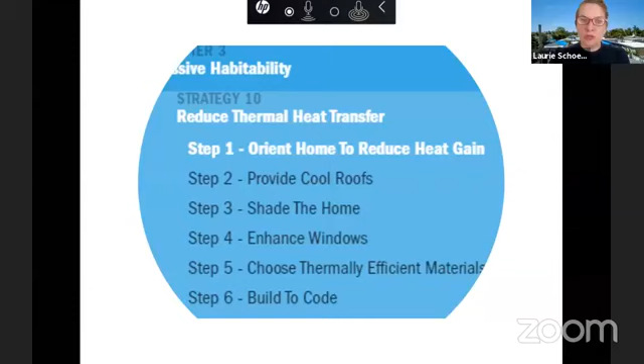Next slide. Today, we're going to talk about the major strategies that relate to passive habitability: orientation of homes, providing cool roofs, shading the home, enhancing windows, choosing thermally efficient materials, and building to code.

Next slide. Today, we're going to understand ways of reducing heat gain, increasing ventilation, controlling moisture and mold, benefiting from natural light, and then also understanding the concepts of grid stability and instability.

All of you on the call will understand critical actions you can take to increase the resiliency of your building design, construction, and operations. Next slide.

So before we go into the question of passive habitability, I want to spend a minute or two just reflecting on what the grid is in Puerto Rico and why we should be thinking about building housing that can survive without energy.

Puerto Rico's electricity, as in many of your communities with similar utilities, is supplied by the Puerto Rico Electric Power Authority, or PREPA. This is a government agency that owns the electrical transmission and distribution systems for the mainland, as well as Vieques and Culebra, two island communities off of Puerto Rico. This provides 80% of the electricity generating capacity throughout the island.

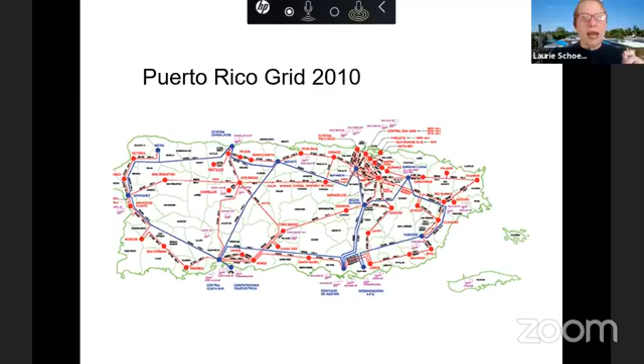So this is the major problem we're dealing with, which is that a lot of homes lose power, and that power is not put back quickly because the distribution systems are hard to re-erect as well as maintain.

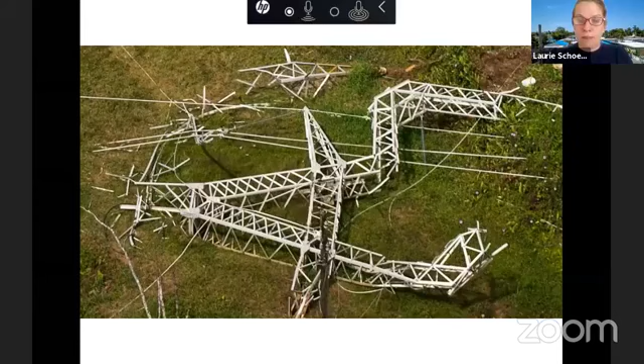Over the years, the budget for maintenance, such as clearing trees to help ensure the distribution is in place near power lines, has diminished. In 2014, there was $202 million for this maintenance, which was a reduction of $50 million from 2007.

What does this mean? This means that when the distribution lines go down because they're not maintained, the power goes out. And when the power goes out, the households are left in the dark.

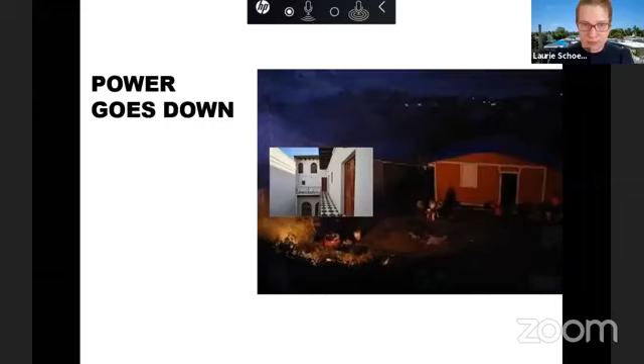How can we learn from our ancestors, from the past, about adapting to a future where these power lines are not stable? They will continue to go down. The grid will continue to fail because it is a very difficult system to maintain and operate, particularly with less funds coming in. So today's conversation is critical.

Because we have someone with us, Dr. Abruña, who is not only a great colleague of ours and friend of our program, he is in many ways considered the father of green in Puerto Rico. He had the foresight and the vision to bring these concepts to Puerto Rico at a time when no one was talking about green, when the connection and dependency on oil and mechanical systems was at its height. Dr. Abruña has been working fearlessly for years to champion sustainability principles and the principles of our ancients, to bring back natural ventilation and natural lighting. He has been one of the most incredible partners to work with on our book, which is why we wanted to dedicate this session to him. He's the founding past president of the U.S. Green Building Council, Caribbean chapter, a publicly recognized authority in sustainable design, and is in charge of his own architectural design practice. You'll hear more about that today.

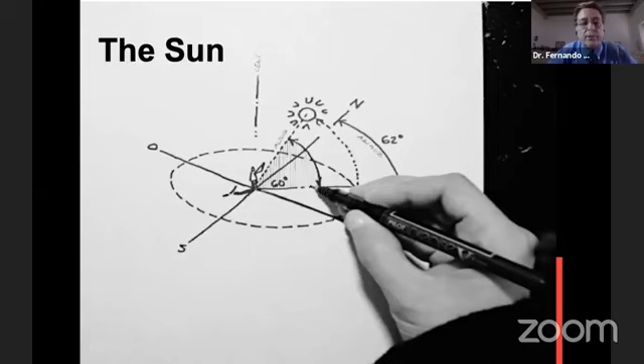Okay, so let the behavior of materials you select, the properties of forms you give to your building, and the forces of nature like wind, rain, and sun do the work for the building. That's what we try to do when we do passive design. So let's get into how we deal with the sun.

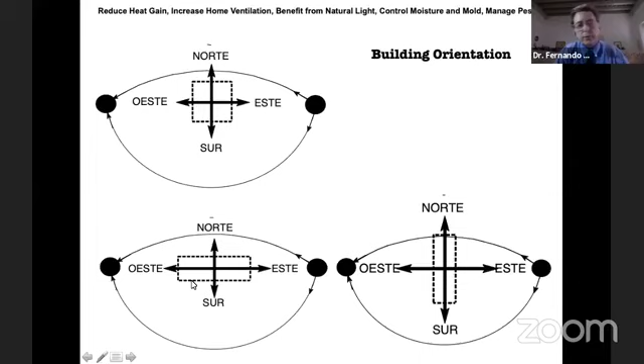So it's very important for us to be aware of how we place that building on our site. Since the sun moves on a...

higher altitude during the year, in the summer, the angle — and I'll show you a picture to better understand this — the angle will make it almost a requirement to have overhangs to protect us from that sun.

But in the south, the altitude angle is much lower, and that happens during the winter. And during the other parts of the year, the sun comes out in the east and sets in the west.

So typically what you want to do to protect your building is have vertical shading devices on the east and west orientations and overhangs on the north and south. If it's another orientation, say northeast, northwest, southeast, or southwest, then you use a combination of both.

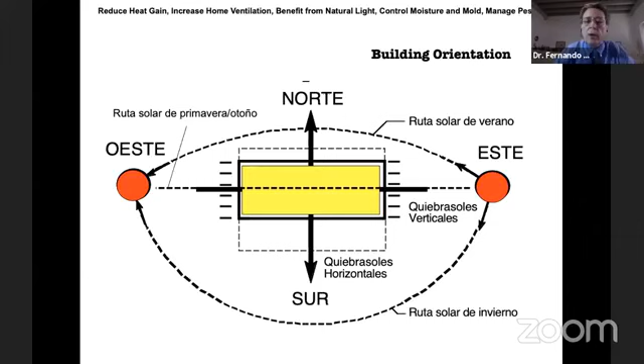Here you can better see the relationship between the winter sun and the summer sun. Okay, so it's high — the angle is very high — so with a shorter overhang, you can protect that wall. And in the winter, with a longer overhang, you can also protect that wall.

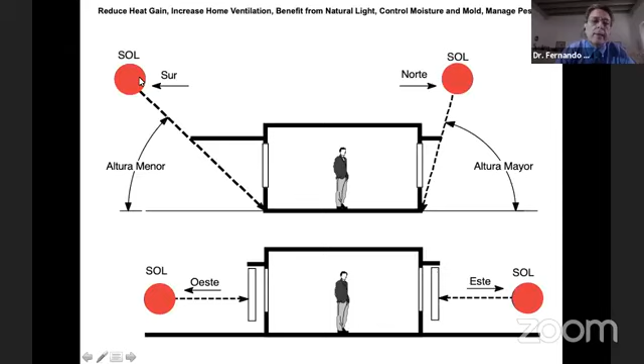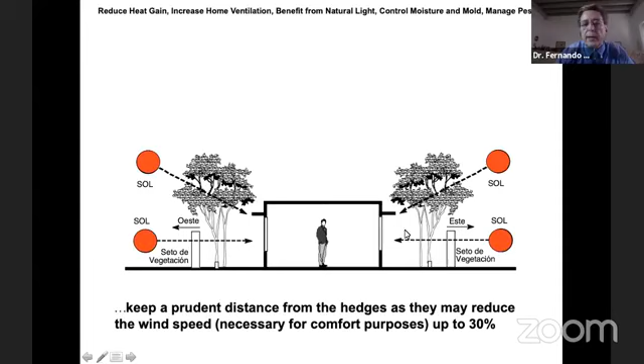In the east and west, we will be using vertical shading devices. You can also use vegetation — a hedge, a planting hedge, or a tree — to basically accomplish what we achieve with overhangs and vertical shading devices. Let's do a quick exercise here.

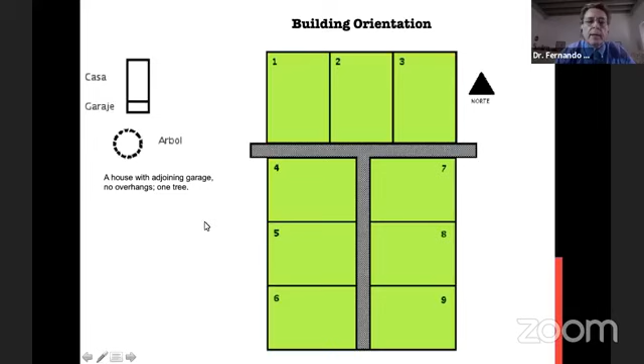Let's take the following scenario: this is a typical urban lot with typical urban development with 9 lots. North is facing this way, and we are to locate a house with an adjoining garage, no overhangs, and just 1 tree. If I were the developer, this is most probably how I would end up doing it, okay?

With the larger facade facing the street so that the house looks more regal, more important, than if I were to locate those houses with the shorter facade to the front, to the street front.

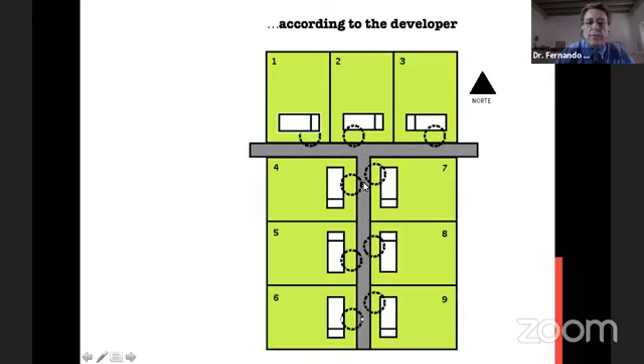But if you look at them closely and use your sustainability acumen, you will notice that these 3 houses will behave much better than this other one here, just because of the orientation factor, okay?

North, south, east, west. But of the 3 houses on top, the one on the right will be even better, because the garage will be protecting the west facade of the house, and it will act as a buffer for that heat that penetrates the house in the afternoon.

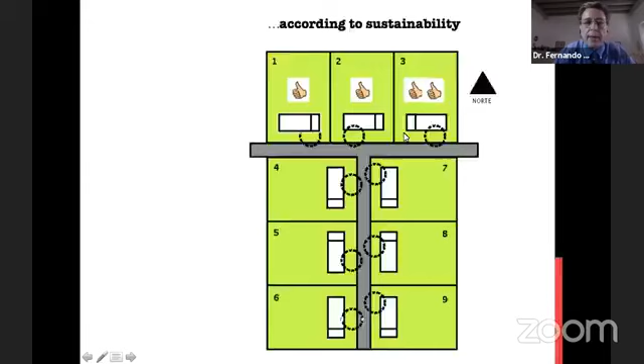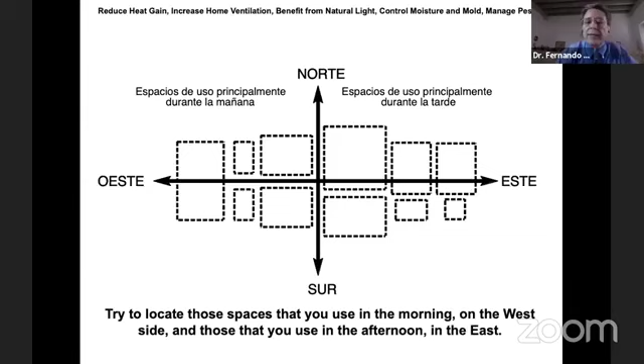So in general terms, you want to locate those spaces that you use in the morning on the west side of your house, and those that you use in the afternoon on the east, because the sun will be on the opposite side from where you'll be using your house.

So this is just an example, right? Like the garage on the west to protect the dorms, and the storage area on the east to protect another dormitory. So this is just a general idea of how to have that into your mental picture of how you want to order the interior spaces of your house.

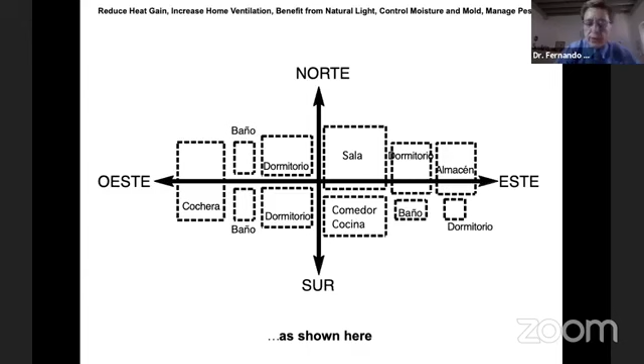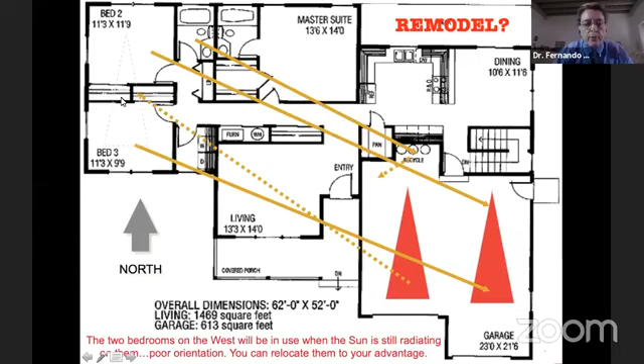You can also remodel. Say you move to an existing house and you want to improve the thermal comfort inside that house. One possibility is to rearrange those interior spaces. Again, these two bedrooms are on the west side, and typically you go into your bedroom in the evening, so those will probably be very hot in the afternoon. So you can relocate those to your advantage, as shown here.

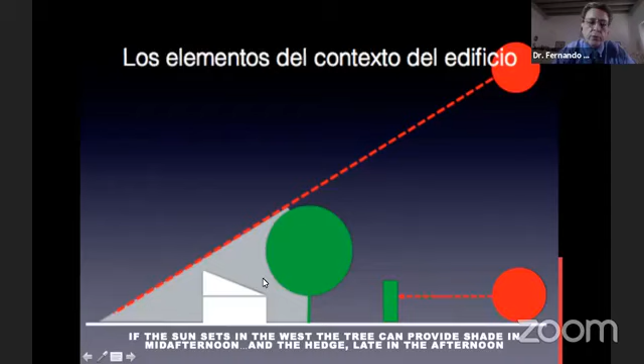And these are some other elements that we just spoke about, the contextual elements, the sun, the tree, and the shadow that it casts upon the building. If it were a mountain, it would do just about the same. So that siting is very, very important. But actually, of all the decisions that I as an architect make, siting is probably the most important one, even more important than the architecture itself.

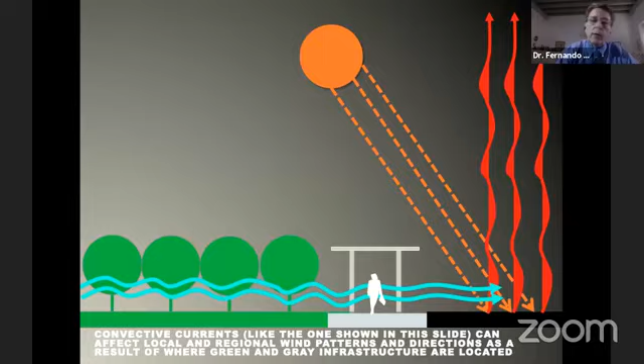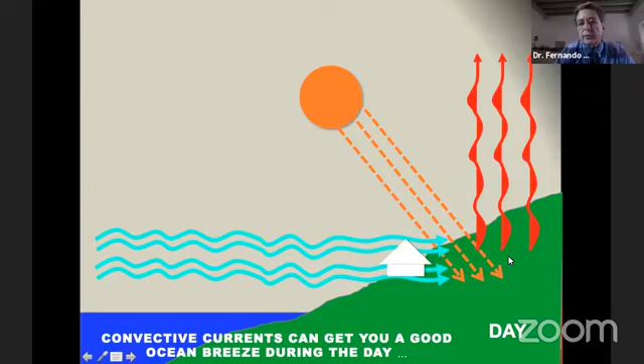So in general terms, the way wind moves regionally in the coast where we have the ocean front, it will behave in one way. In the mountains, it will behave similar to what I was showing here. We have convective currents in the ocean with the ocean breeze during the day. Since the land is hotter during the day, that same thing happens, just as I explained in the previous slide. Hot air rises, cool air comes in through the house.

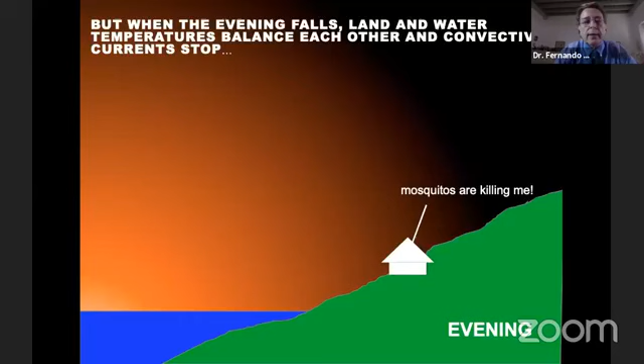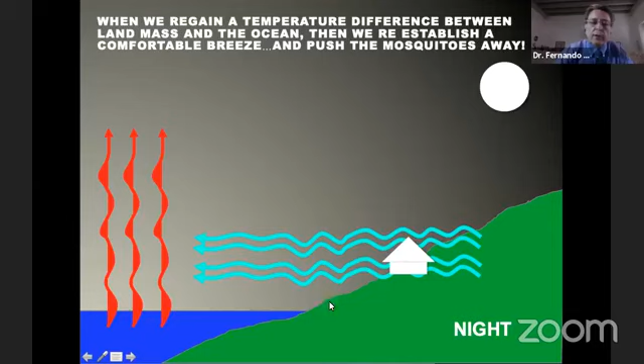When the evening falls, both temperatures, land temperature and sea temperature, cancel each other out, and that's where we have a lull and no wind goes anywhere. There's no wind at all, no breeze, and that's when mosquitoes get you. So, and that happens between 6 in the afternoon and maybe 7:30 and 8 p.m. Right after that, we get again a temperature differential, and again we'll get our breezes coming from land into the sea.

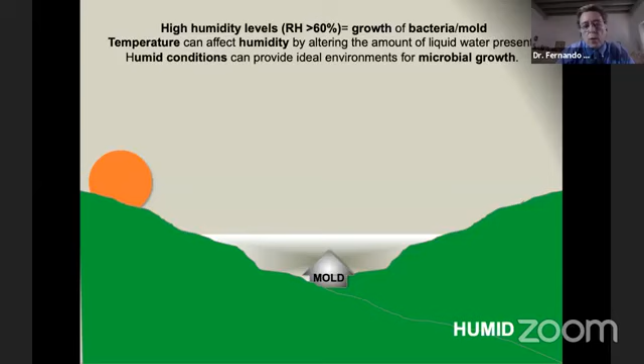The same thing happens in terms of your location with relation to the topography. Right here, you see the topography, how the house is located in the lower part of that topography, and how humidity collects there. So if you want to prevent mold, you get out from that area and you move up here where you won't have the humidity that you would typically have down here.

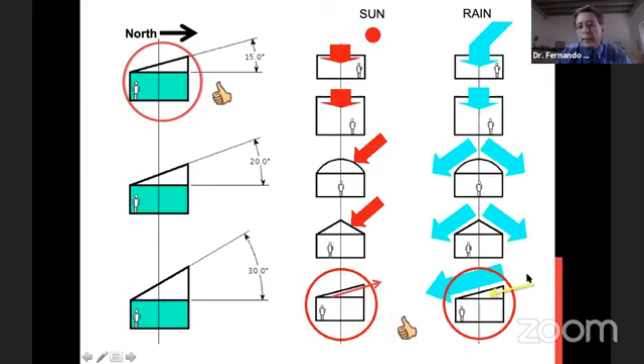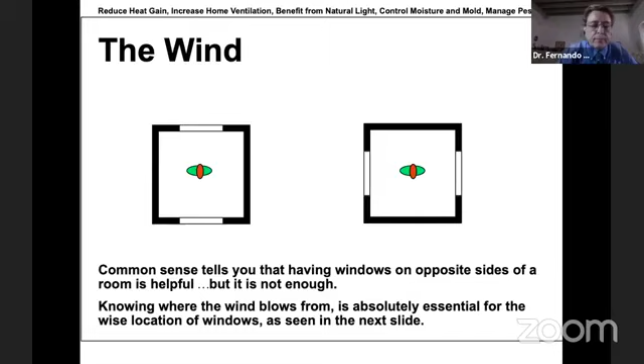If we talk about the wind, common sense tells you that having windows on opposite sides of a room is helpful, but that it's not enough. Knowing where the wind blows from is absolutely essential for the wise location of windows. This one is the windows located to coincide with the prevalent wind direction. This one was not, and look at the difference. Both would have what we would normally call the potential for cross ventilation. This one does, but this one doesn't, because we didn't take into consideration the main orientation of that wind.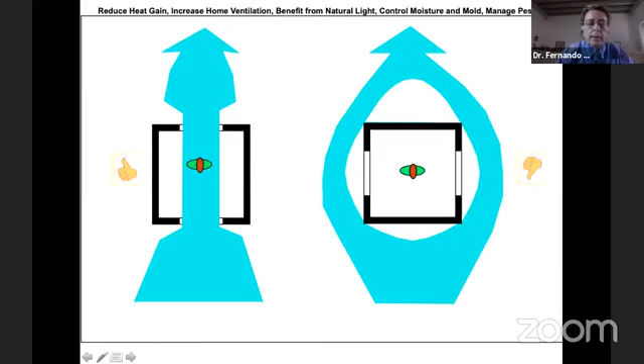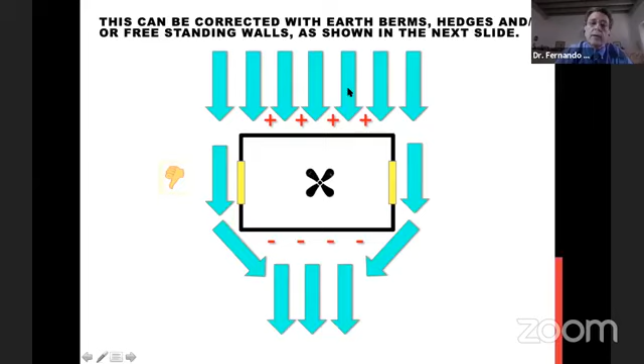We can fix that. In this case, we have a building with two windows, but the wind coming is parallel to those windows, so we don't have any wind going through the building. If we want to fix that, we can use a berm, a hedge, or even a freestanding wall, and the wind pressures will collect in such a way that it forces the wind to go through the house, even if the windows are not perpendicular to that wind force.

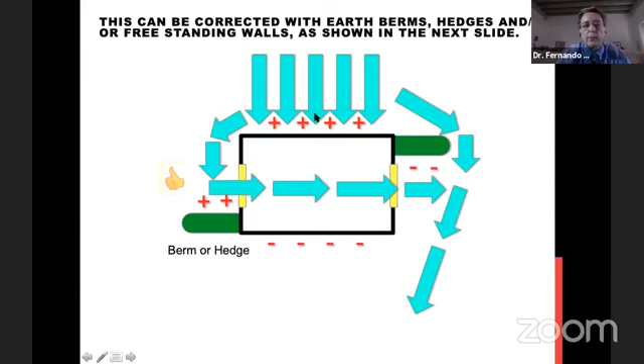We also have to be aware that when we plant trees or hedges close to the house, the wind speed is reduced significantly. So that's one thing you have to take into account. Keep your distance in order not to interrupt those breezes into the house.

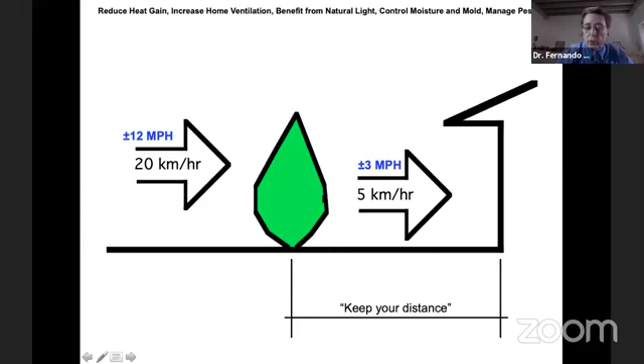This is a very important slide. The next couple of slides are very, very important, and there's one that's absolutely essential, and it deals with how the wind behaves inside the building. If you look closely, the wind here is moving up into the space, and here it's moving even higher, almost to the ceiling. That behavior is determined by the wall area you have facing the wind. So here we have more area under the window than above, and the force component will force the air in this way.

Here, when we put in an overhang, whatever pressure points we had here are canceled, and the only vector forces will be coming from below, and that forces the wind to the upper part of the house. What we do want is for the wind to go through our bodies so that we can shed heat into the wind.

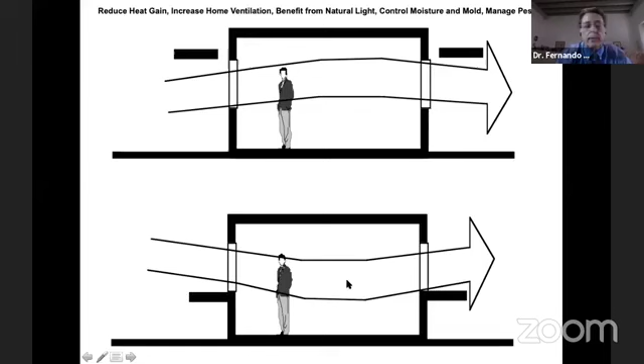We can separate the overhangs and reestablish the same wind pattern as before. If we use a shelf or a bench, look how different the wind pattern inside turns. This is more or less the same thing, except it's more clear because of the symbols we put here. There's more pressure here than there because there's more area here than here, and that forces the air down.

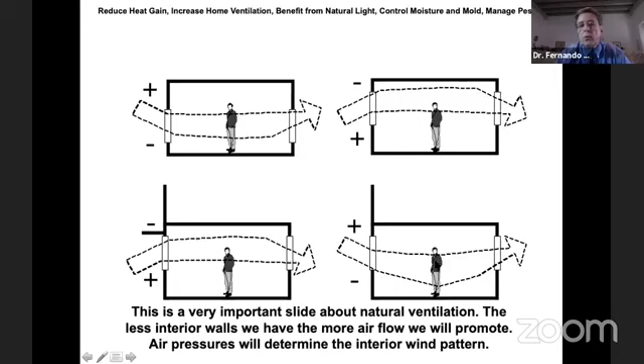Here we have an overhang, so this is canceled. This could be a second floor or a very large parapet, but the lower area will force the wind above. You can have a second floor, or you can have no overhang, and since this area will be bigger, vector pressures will be higher here than there, and the wind will be forced down into your body, but that's what we want.

Ventilation by convection, also called the stack effect, is good for health ventilation, but typically not good enough for comfort ventilation. You need a certain speed, typically between 5 and 8 miles per hour, to get a comfortable ventilation effect. The stack effect will move the air, but it will be very slow, and you will get some cooler air from the lower parts of the building, but still not enough to make you evaporate your sweat.

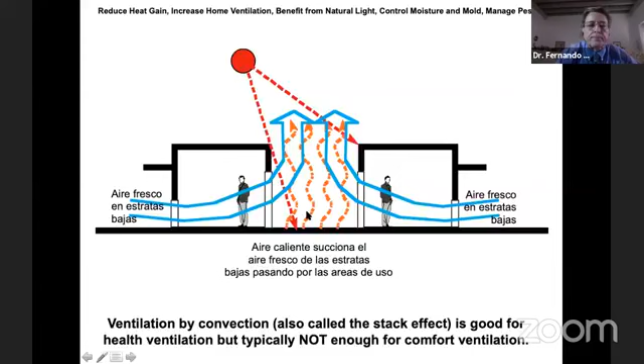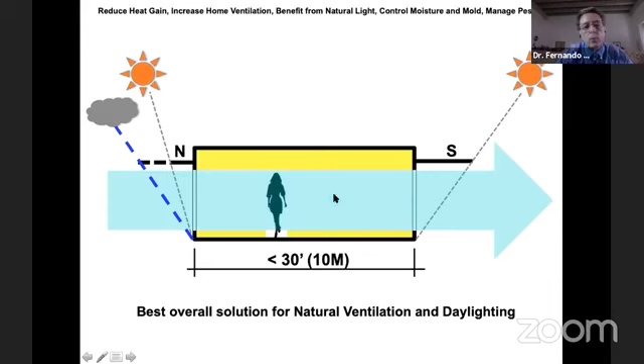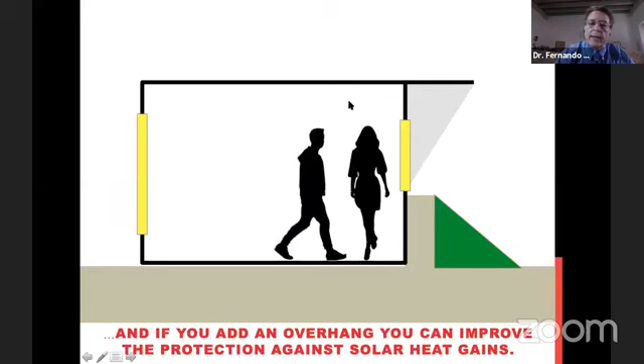So if I were to simplify all that we have explained so far, this is a summary of that. North overhangs should be short, unless you want to protect yourself from the rain, in which case it'll be longer. On the south, you want longer overhangs, and you want windows as big as you can so that the wind flows through your body. You can also use berms to protect against the heat load.

If you use 8% of your roof area with skylights, that will provide you 100% of daylighting in a building. And the trick here is to maintain your width from window to a maximum of 30 feet. If you do a bigger area, you will have some obscure or shaded areas in the center of the building. You could solve that with the use of skylights.

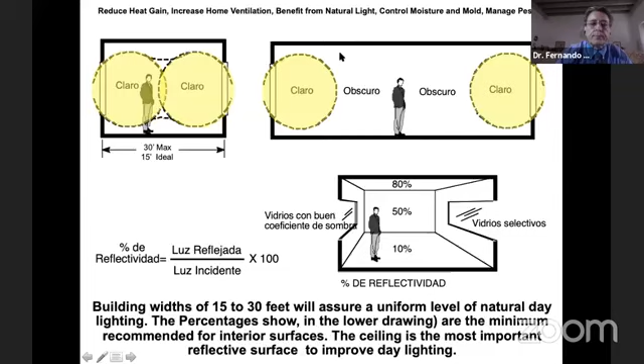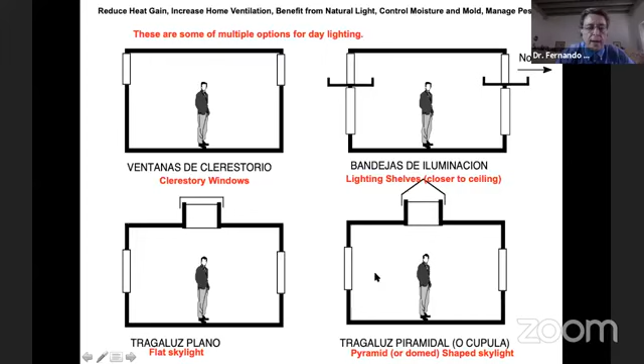This is a glossary of different possibilities for indoor daylighting: clerestory windows, lighting shelves, flat skylights, pyramid or dome-shaped skylights, a monitor with an overhang protected skylight, directional skylights to the north and south, and directional skylights only to the north, which is the best location because you will receive lots of light and very little radiation.

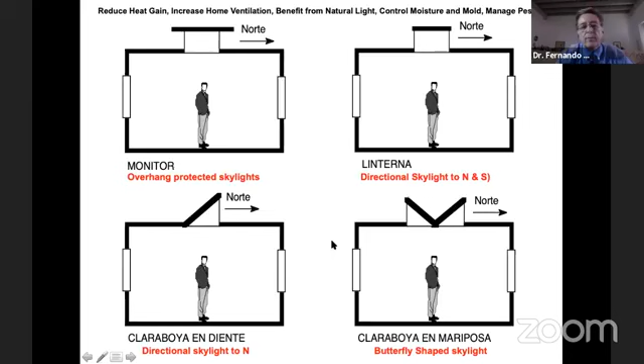So let's talk a little bit about iguanas. Iguanas are a big problem in Puerto Rico. There's more than 10 million of them here, and it's very difficult to control them because they don't have any natural predators. So they typically die when they try to cross the streets and roads, and you see them being squashed by the cars.

I had a problem at Casa Ausente, which I'll be showing you real soon. We tried many things. The one that worked the best was red pepper, believe it or not. I sprayed red pepper into their caves, and we got rid of them. At one time, we had 60 of them in the house.

Mosquitoes typically need 10 to 14 days to develop in standing water, so it's also very important to dump that standing water. We have to be careful with rain gardens, which are much talked about these days, in clay soils, and we have plenty of those here in Puerto Rico. During the rainy season, they could become breeding grounds for mosquitoes.

These are very simple strategies. Pave the roads and trails with permeable gravel or stone instead of concrete. The light reflected by the color yellow keeps away insects, making unnecessary the use of insecticides, toxic to your health. So on open outdoor spaces, we typically use yellow lamps that will keep the mosquitoes away without the use of toxic chemicals.

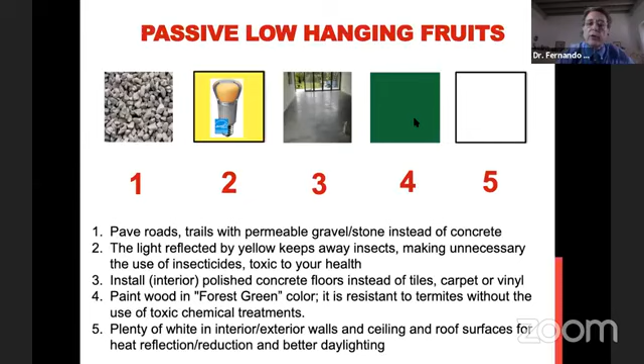The same thing with green. Forest green is a color that, in its pigmentation, has something that termites and wood-boring insects don't like. So without using any chemicals, just because of the pigmentation of that particular color, that will protect the wood you paint with it.

So, passive survivability—if I were to make a summary of what we talked about: why depend on pumps if we have gravity? Why depend on lamps if we have daylight? And why depend on air conditioning if we have a breeze?

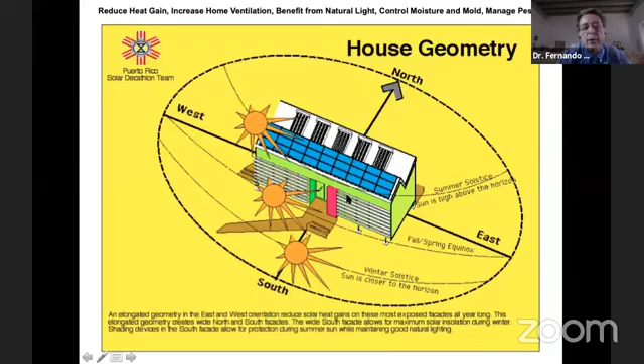So I'm going to be showing you some case studies real quick. This is the UPR Decathlon House that we did in 2002. We got second place in the sustainability and habitability competition. It's an elongated form, as we were talking about. We have the photovoltaic panels facing south, with many windows on the south. This was located in Washington, D.C., in the Washington Mall, so the conditions there are different from ours, but still the south-facing windows need to be protected. So instead of having one long overhang, we have many of them, but very short ones, and they do the same job.

Here's how it looks with the shading devices and the photovoltaic panels, and how we assembled that house in Washington. In Solaria we use thermal insulation everywhere.

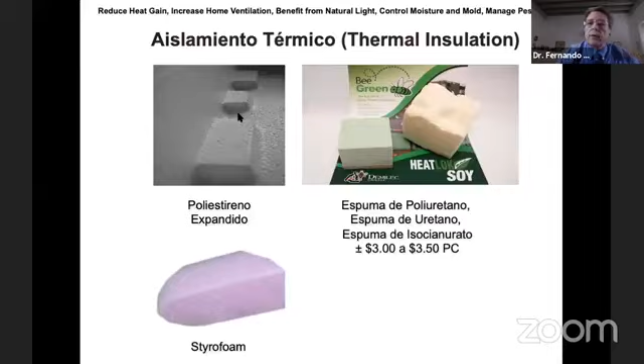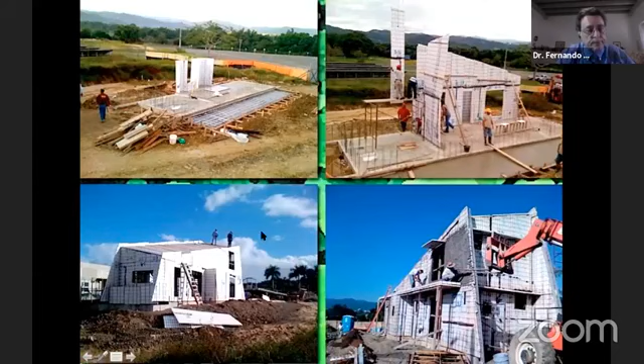This is some shots of how we built that house. They're all core insulated concrete structural panels. The white stuff you see there is expanded polystyrene. We built this in two or three days, spent about 2.5 weeks plastering it, and in about a month and a half we had a finished house based on this sketch with the bedrooms.

Again, we're using this as a buffering zone. The same thing here with the rainwater collection. That's how it looks, and you can see here how the building was shaped.

This slope faces south, so the solar hot water heater collector and the photovoltaic panels face in the right direction. But there's also a slope coming into this corner, so all the rain that falls on that roof is collected into this rainwater harvesting cistern, which works with a pump that pumps water into the house.

This is how it looks from the interior. We even published, as part of the house, a user's manual, which I believe all houses would need. When you buy a computer you get an instructions booklet, when you buy a refrigerator it comes with instructions, but when you buy your house, you don't get that. We believe this is a good instrument that needs to be used when we do design work.

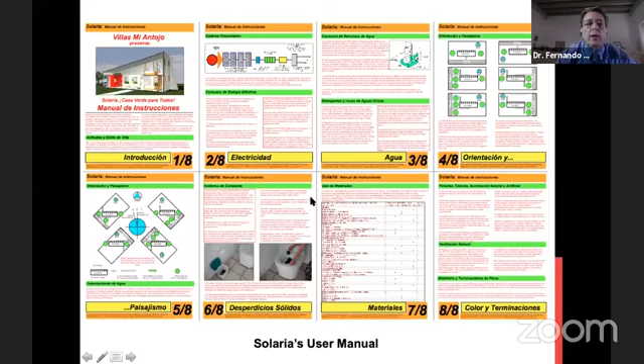You want to let the people you design for know how the building works, how it behaves, and if they're going to make changes, how to do those changes so that they do the right thing at the right moment.

EcoHab are two houses that we did for HUD, Housing and Urban Development, the HOME program through the municipality of San Juan, and they were certified as Energy Star homes and also LEED for Homes Gold.

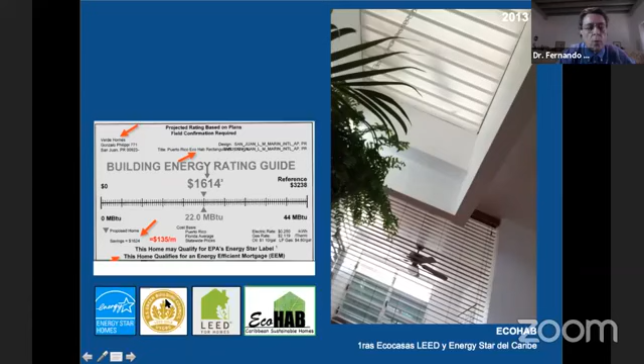This house is very interesting in the sense that it's a typical suburban lot. There are two houses, this is one of them, the elongated one, and this is another one. Both have interior patios to improve daylighting.

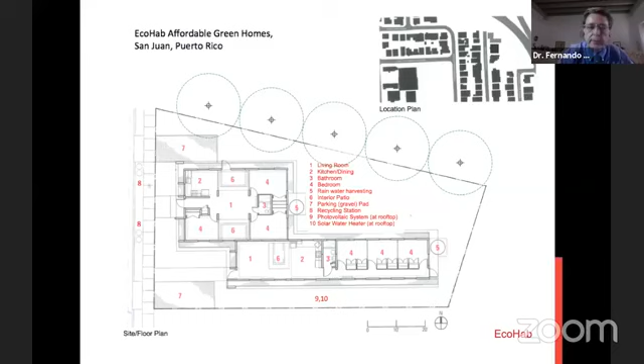Both of these have what we call transformable walls that can be pulled up or down in order to make those spaces react passively, and make the transformation possible without any interior construction or demolition work.

So here you can see how that behaves. A bedroom could become a potential future office looking into an interior patio, or this interior patio could become a larger dining room with a skylight on top.

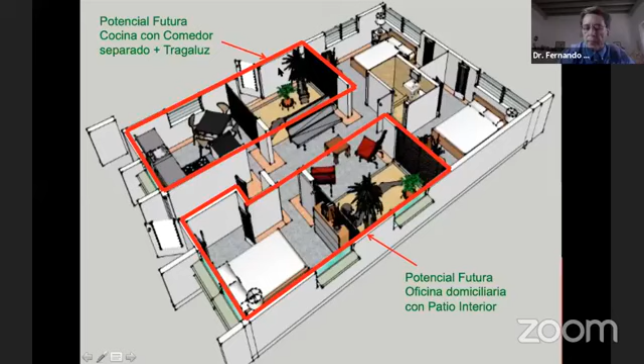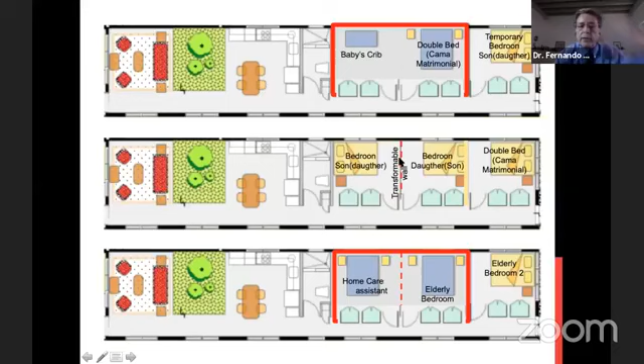The same thing with the other house: the transformable walls allow you to have different bedroom configurations as the family grows and changes through the ages. Early on, this is more or less the interior arrangement, and as you get older, this would be the typical arrangement.

We used precast core insulated structural concrete panels for this house and these two houses. They were assembled in 2 days, the roof was poured in place, and it took about 2 weeks to plaster the whole thing. In about a month, we ended up with the house you're looking at.

This is the bigger one, and the other one I'll show you some. We got a patent on that window that you see here, and I'll go real quick on how that works.

It has an aluminum shading shelf and 3 glass jalousies. So if you want natural ventilation and daylighting, you leave those open and you have your breezes go through, and plenty of light coming through that glass.

If it's really hot and you want to turn on your air conditioner, you leave the shading shelves open but close the glass jalousies, so you still have the benefit of natural daylighting but no air conditioning escaping through the building.

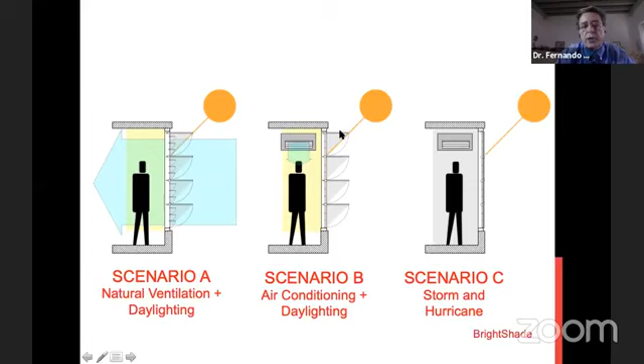In case of a storm or hurricane, you overlap the aluminum shelf on top of the glass jalousies and it becomes a storm shutter. That's how it looks, and these are some shots of the interior of those spaces.

Look at how, and these are not retouched photographs, these are real photographs taken at the site with the use of the window I was just talking about and the use of interior patios, how nice the lighting conditions are there. So no lights there, this is all natural daylight.

This is the other house, and you can see here what I meant by transformable walls. We're looking now from the kitchen and dining room through an interior patio into a bedroom, but you can close those to get some privacy. Here they're all collected, collapsed up, so the whole house opens up to natural ventilation.

We have a 15,000 BTU unit that cools the whole house, which is close to 1,000 square feet. In Puerto Rico we typically use 12,000 to 15,000 BTUs per room, but this whole house is cooled with just one mini split unit because we're using plenty of insulating material, both in walls and on the roof.

This is one of the nicer shots, I believe, that shows you looking from one interior patio into the other, and the single air conditioning unit, that the air is distributed with the use of ceiling fans. We also have our photovoltaic system, a very small one.

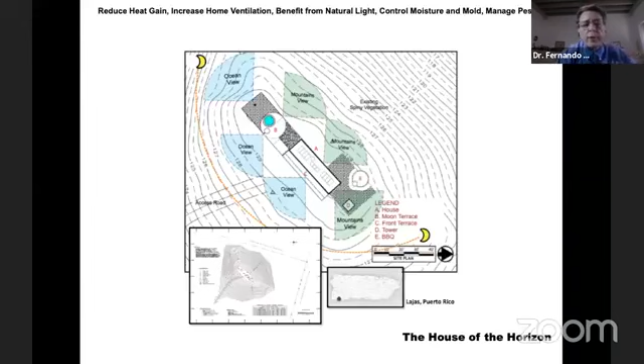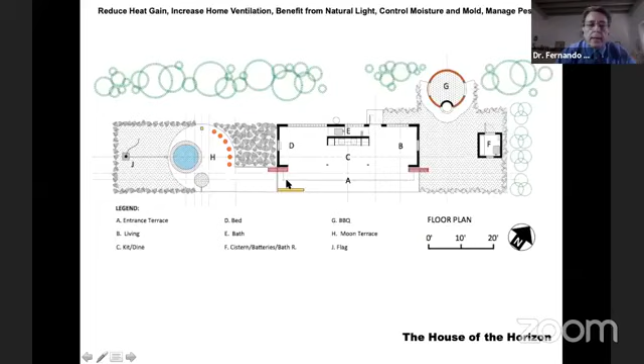And it's a very simple house, similar to the examples that I was giving to you. This would be the bedroom area, living, and a sofa bed that allows the owners to have like a second bedroom, kitchen and dining, and the bathroom with a composting toilet that uses no water. And this is how it looks. It's very open, like a big balcony looking into the landscape.

So there's no need for air conditioning, although this is in Lajas where it gets quite hot. It's a very dry environment compared to the northern coast here in Puerto Rico. So the owner asked us to install an air conditioner, which we were not going to be able to put it to work with the small photovoltaic system that we installed.

So what we ended up doing, I'm just moving real quick so that you can have a sense of how this works. We installed - he's an anesthesiologist, a medical doctor. We convinced him to use what he's used to do with his patients, and close them with a curtain so that the air conditioner only needs to cool the area of that bed instead of the whole bedroom. Again, here are patented windows in order to get some shade.

And we even installed, included as part of the design, what we call a lunar terrace with the lunar lamp that you see here. That lunar lamp is comprised of a mandala with white stones that shine really nice when you have a full moon. But when you have a new moon, there's no moon at night in those days, then this concentric circle here collects energy from the sun, and at night it glows. So it's a lamp that behaves differently when you have a full moon and when you have a new moon.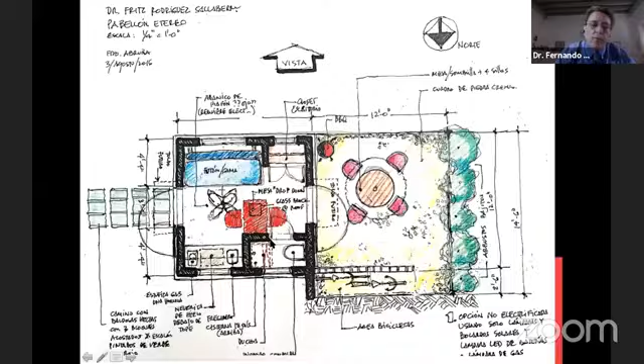Ecovito is a very small, very, very, very tiny house. This might be even a nano house, but we also use lots of insulation material. Again, this would be a solar lamp, very simple. This whole house runs with just one photovoltaic panel.

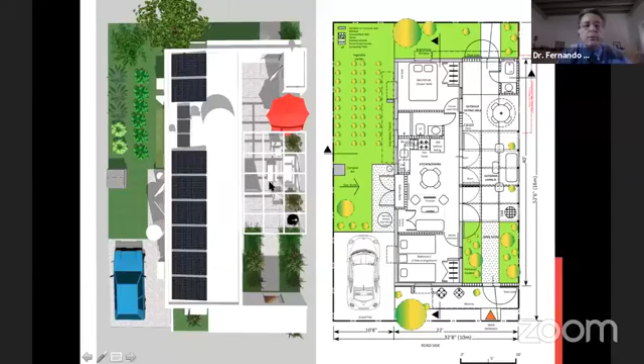And this is the house that we're working on now. We're almost done with these houses. We should be finished by the end of this month or by the beginning of next. It's also a very simple solution with the long facades facing south and north. The north side is this one here. That's why we place the pergola on the north side, because it will get plenty of daylight with little heat radiation from the sun. This is how it looks from the front facade.

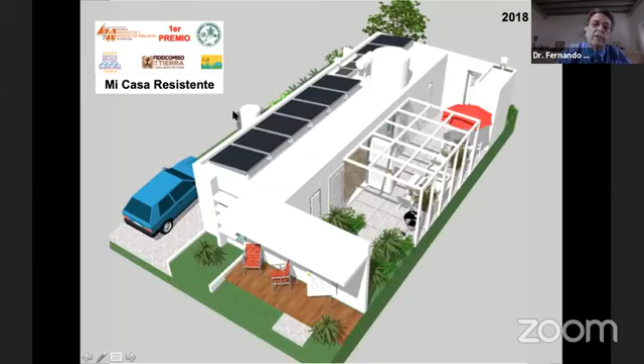Very, very simple. We have triple redundancy in the water systems. We have the utility water from PRASA. We have a PRASA-fed rooftop cistern and a rainwater harvesting system that works by gravity.